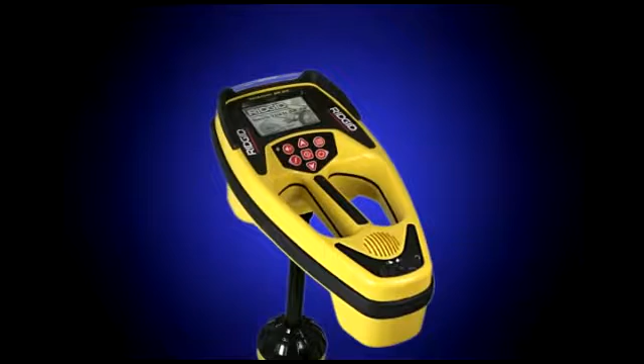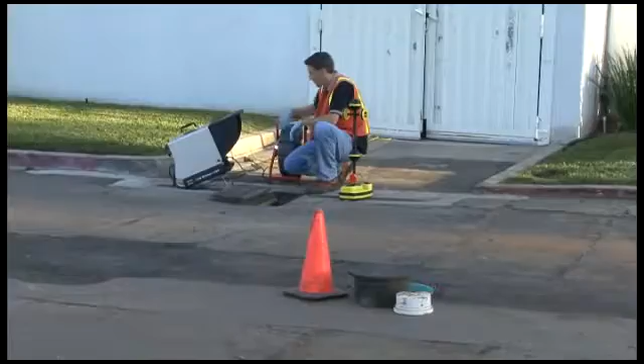The SR60 makes it easy to get a precise mark on a remote transmitter or sonde, and in this segment, we'll show you how to pinpoint a sonde's position quickly and accurately. The sonde we'll be locating is part of a SeeSnake video pipe inspection system. The sonde is located inside the spring, right behind the camera head, and operates at 512 Hz.

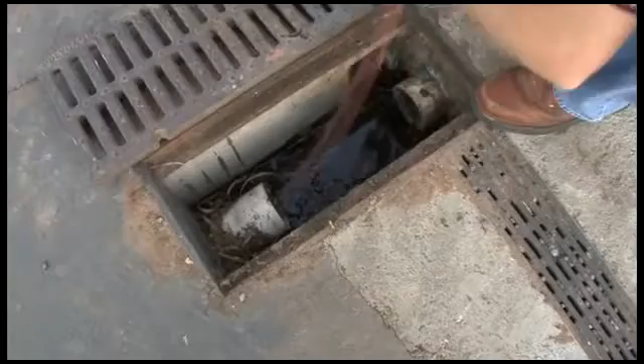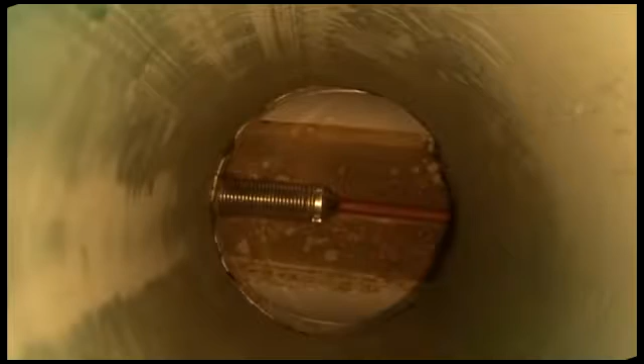We've put the camera into a drain line that tees into another line after about 8 feet. We've pushed the camera past the tee and positioned it directly under a 90-degree cleanout. We've removed the cleanout cover, and the camera is visible in the bottom of the pipe. The camera is in position, so we'll activate its transmitter.

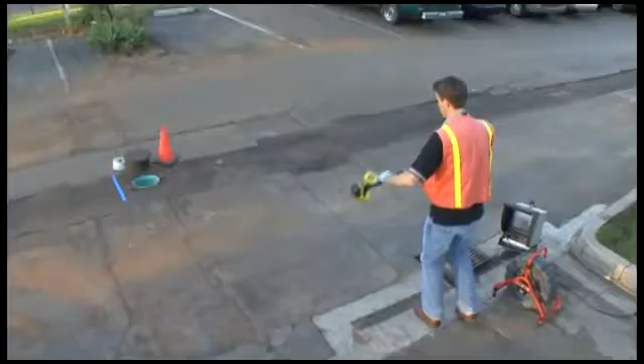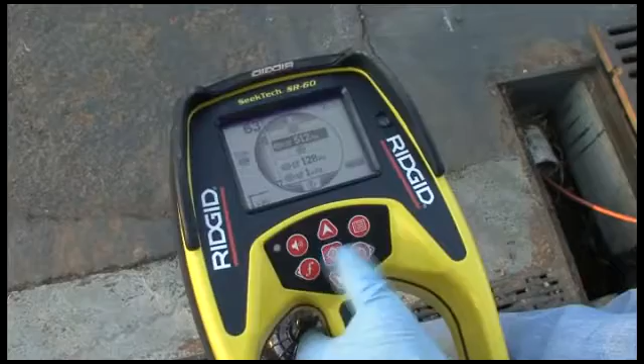If 512 Hz sonde mode is not available by pressing the frequency key, you can enable it in the main menu. See the Getting Started segment of this video for instructions on how to do that. Additional sonde frequencies are also available, and your operator's manual contains instructions on how to enable them.

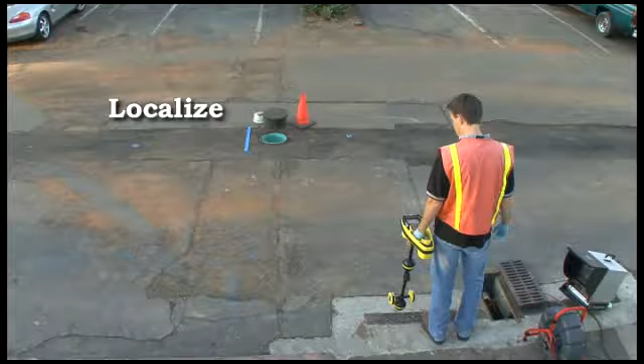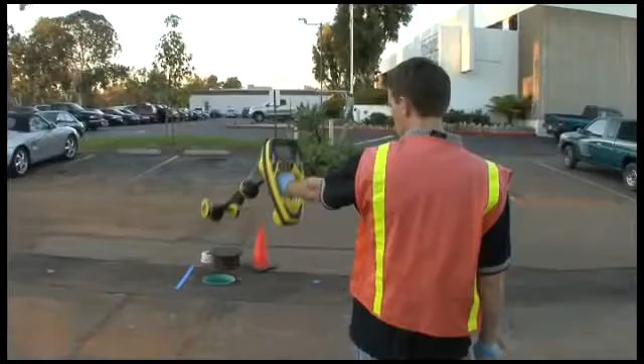Locating a sonde with the SR60 can be boiled down to 3 basic steps: localize its position, map its location, and verify your result. We'll localize the sonde by using the signal strength reading to locate its general area. We'll just extend the receiver and sweep it slowly in an arc. Keep an eye on the signal reading in the upper left corner of the display. When the number is highest, the receiver's mast will be pointed toward the sonde.

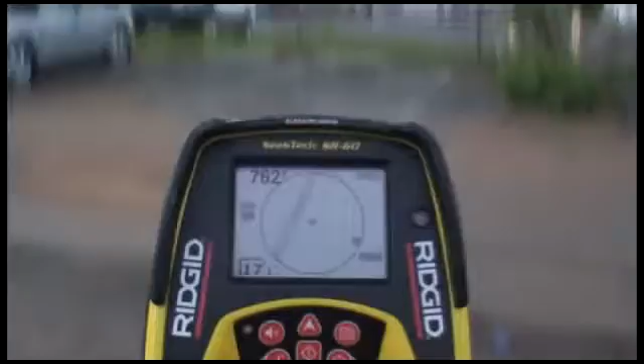We know the sonde's general direction, so we'll lower the receiver and start walking toward it. As we approach the sonde, icons will appear inside the active view area. We'll use these icons to map out the sonde's position. Let's take a look at how we'll do that.

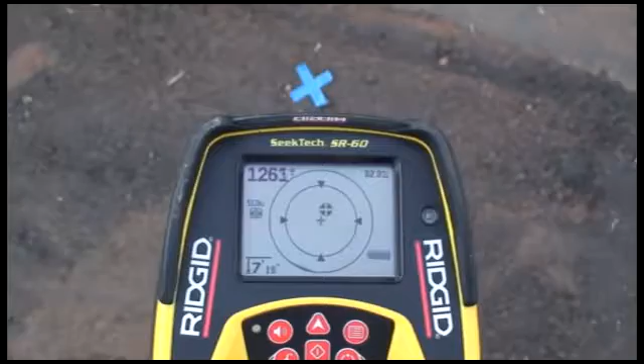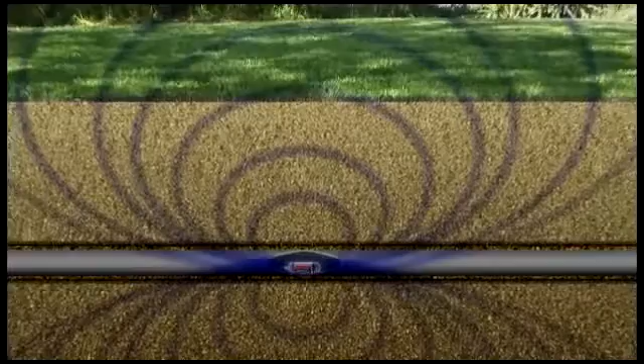The icons represent the position of specific locate points that are based on the shape of the transmitter's signal. There are 2 types of locate points. The first are called poles. There are 2 of them, and you'll find 1 pole at each end of the sonde's antenna. The other type of locate point is called the equator. The equator is a plane or imaginary line that passes through the center of the sonde's antenna and stretches out on both sides until the signal is so weak that the receiver can no longer see it.

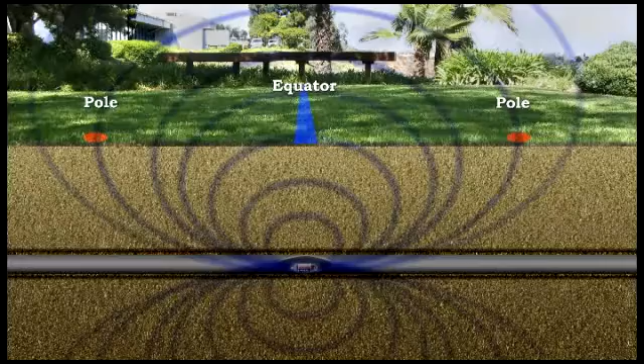When the sonde's antenna is lying horizontally inside the pipe, and the ground above is also flat, the equator will be located about halfway between the poles. If you draw a line between the poles, you'll find the sonde where that line and the equator intersect. The SR-60's display contains icons that represent the position of the poles and the equator.

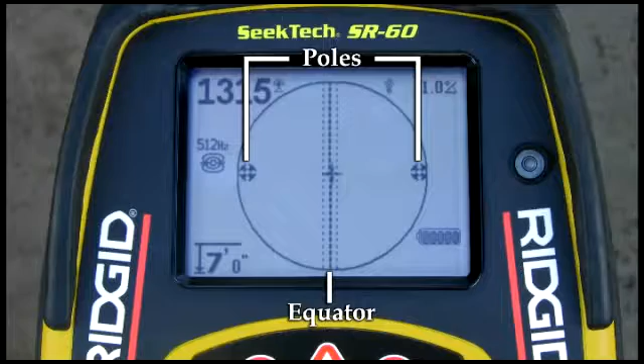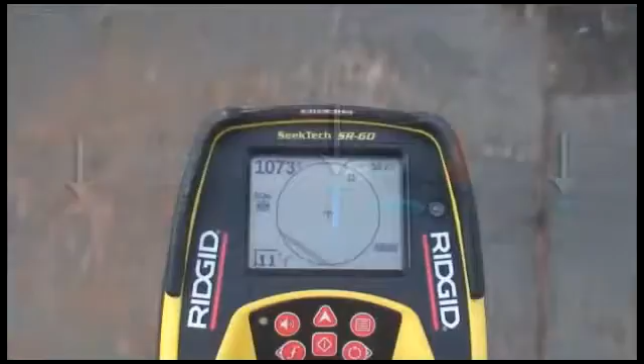To map out the sonde's position, we'll locate and mark the 2 poles, and then we'll locate the equator between them. To make it easier to see what we're doing, we've pre-marked the position of the 2 poles and the equator. When you get close to the sonde, the receiver will display the location of the closest pole. We'll simply move the receiver until the pole icon is centered on the crosshair, and then we'll mark its position using the marker chips that are included with the receiver.

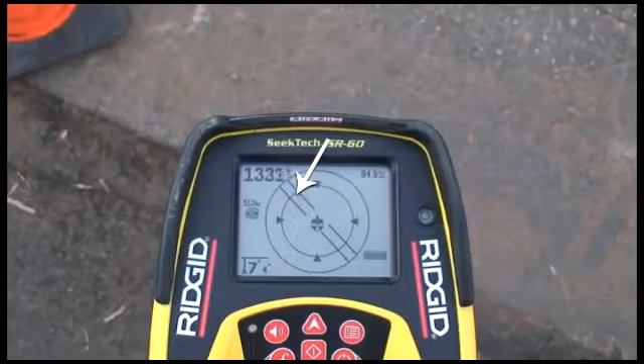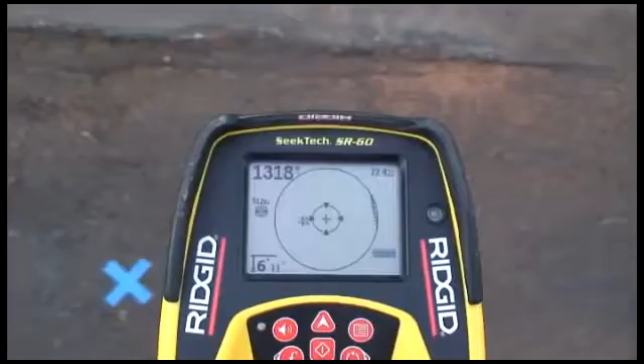After we get our first pole, we'll see a double line on the display. This line tells us how the transmitter is lying underground. We know the second pole is on the far side of the transmitter, so we'll move toward it along this line. We'll pass over the equator, and then we'll come to the second pole. We'll center it on the crosshair and mark its position. Now we'll line the receiver up between the 2 poles and head back toward the equator.

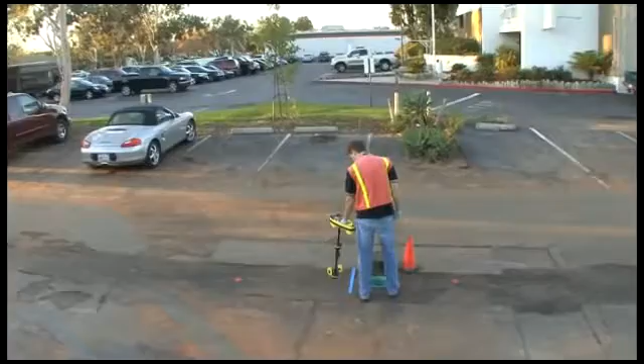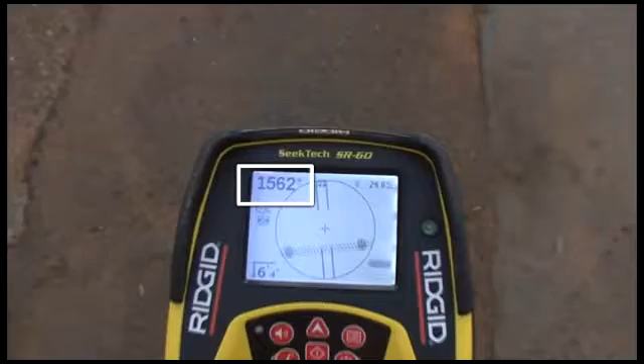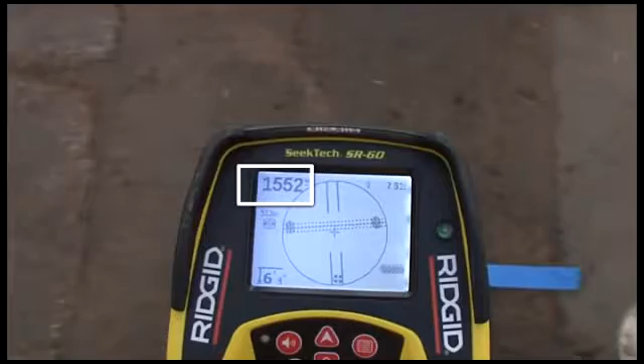We'll center on the equator to finish mapping its position, and then we'll verify our result by making sure that the signal drops off when we move the receiver in any direction away from this point. In many cases, the signal strength will be highest over the equator. In our example, the signal is actually highest a couple of inches off the equator toward the first pole, so that's where we'll mark the sonde's position.

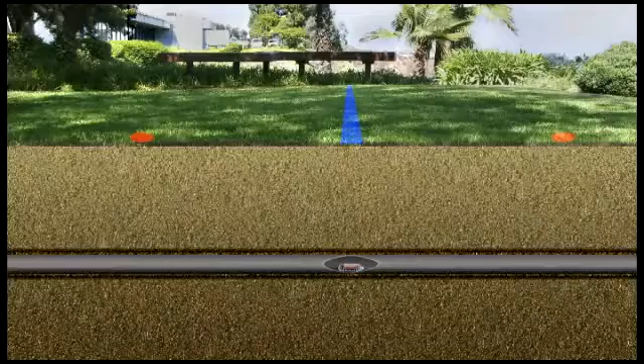Before marking the sonde's location, it's critical that you always verify your locate with the signal strength. Here's why. When a sonde is exactly horizontal, the equator will be centered over the sonde. But when a sonde is tilted, the equator will be offset, and the greater the tilt, the greater the offset. The signal reading is not affected by the sonde's tilt, so it accurately indicates the sonde's position whether or not it's tilted.

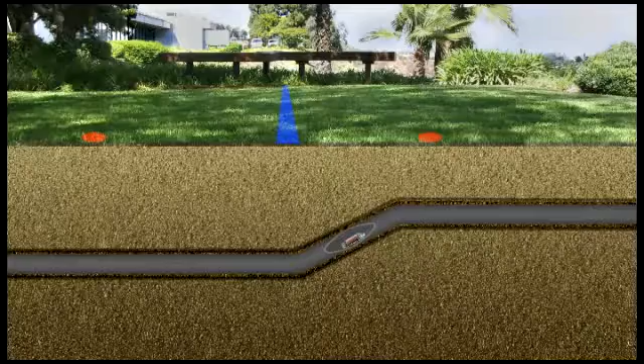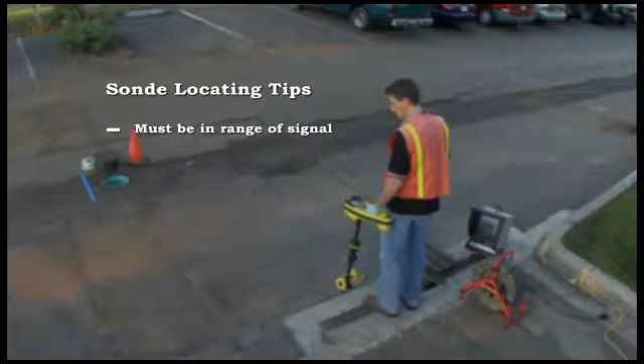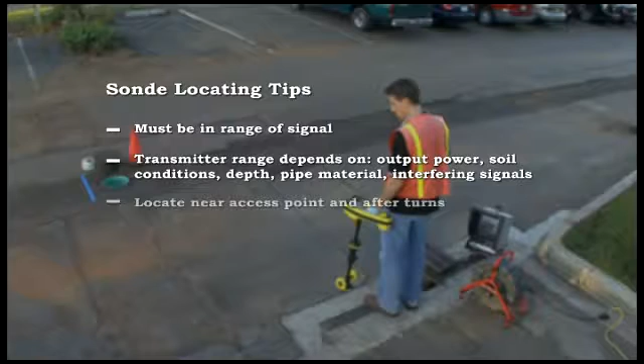Here are some tips that will help you get better locates. First, to locate a sonde, you need to be within range of its signal. This range will vary greatly depending on the transmitter's strength, soil conditions, depth, pipe material, and the presence of interfering signals. We recommend locating the sonde within a few feet of your access point like we did here, and whenever the line makes a turn.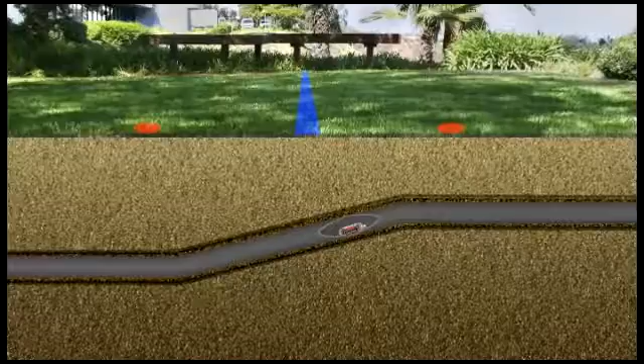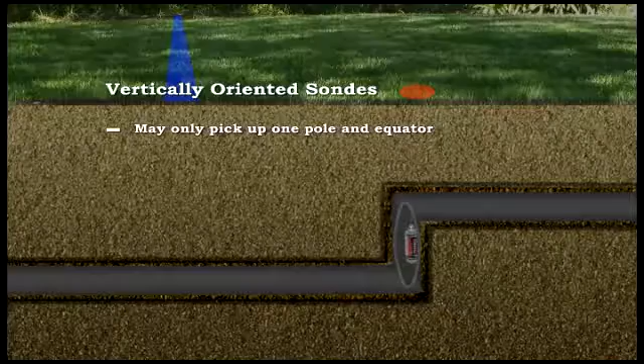We showed you how the equator can be offset when a sonde is tilted inside a pipe. In cases of extreme tilt, such as when a sonde is in a vertical portion of pipe, or when locating a sonde with a vertically oriented antenna, you may only be able to pick up one pole and the equator. In these situations, you can easily locate the sonde using just the signal strength.

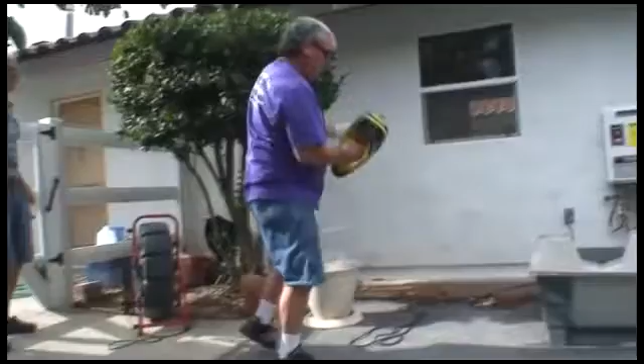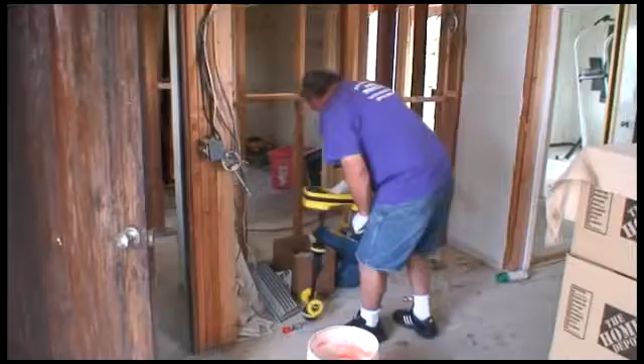In the past few minutes, you've seen how the SR60 makes short work of locating remote transmitters using the simple three-step process of localize, map, and verify. Before using the receiver, be sure to read the operator's manual for additional information not covered in this video.